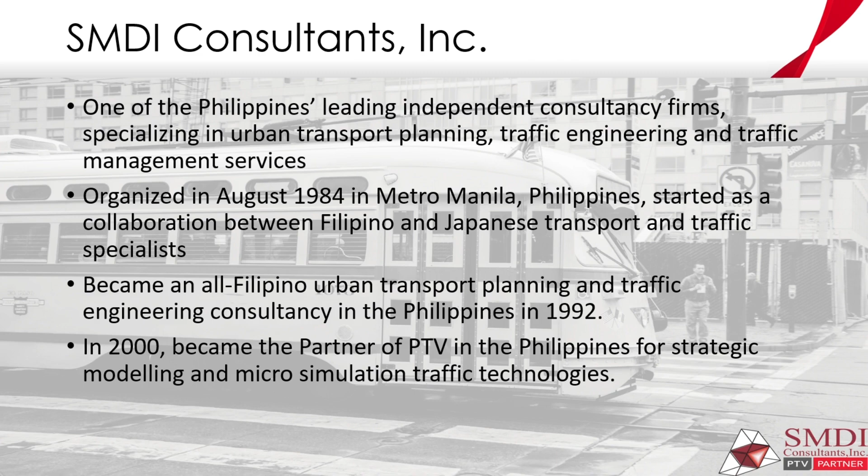SMDI Consultants is one of the Philippines' leading independent consultancy firms. Established in 1984, we specialize in urban transport planning, traffic engineering, and traffic management services. In 2000, we became the partner of PTV in the Philippines. Our main objective in today's webinar is to understand how PTV Vistro is used in traffic impact assessment.

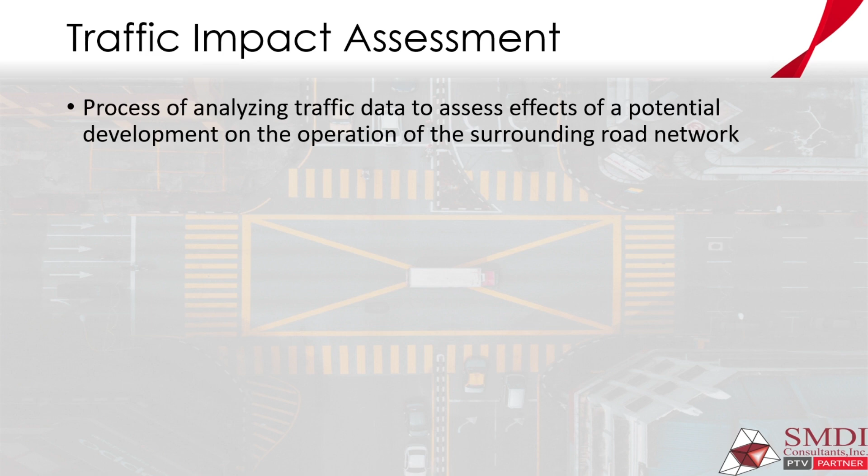Just to refresh our memory, traffic impact assessment is defined as the process of analyzing traffic data to assess effects of a potential development on the operation of the surrounding road network, as a new development is expected to generate additional traffic. Basically, the main objective of a traffic impact assessment is to compare the existing traffic condition on the surrounding road network right before the development becomes operational to the forecasted traffic condition once the development is operational. To arrive at that comparison, we use PTV Vistro to model the following scenarios.

First, we establish our base scenario from existing traffic volumes and composition and existing road network conditions. And then, we forecast future traffic conditions prior to the operation of the proposed development to establish the future without scenario by applying traffic growth rate, which accounts for projected increase in traffic due to regional growth and development. In this scenario, we usually assume that road network geometry and intersection controls will remain the same as base scenario. However, if there are known projects or plans that will be implemented before the operation of the proposed development, those

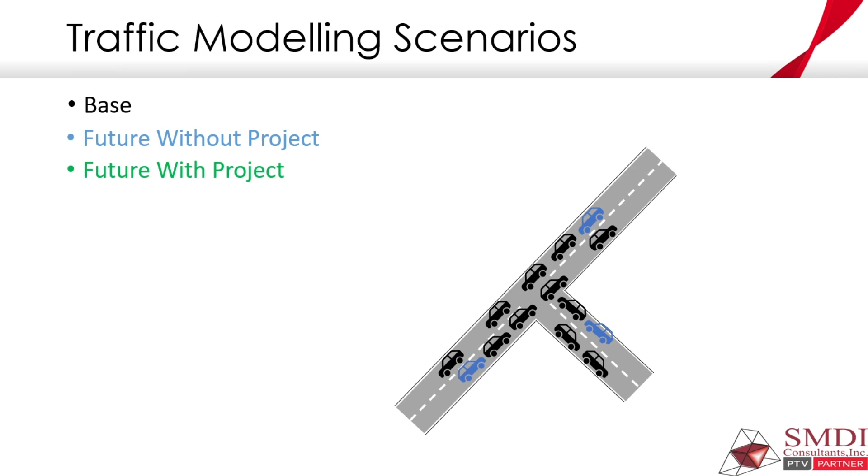changes must be incorporated. And then, we establish the future with project scenario by determining the number of trips expected to be generated by the proposed development and adding that to the future without scenario. In this scenario, we will be able to determine the effects of the proposed development on the road network through different criteria such as volume capacity ratio, average delay, and level of service.

Depending on the location, local government units or the planning department that has jurisdiction in the area may have different tolerance or acceptance criteria on the worsening of traffic conditions. Usually, LGUs do not grant consent to proposed developments which will worsen traffic conditions. In those cases, we can recommend traffic management measures such as change in priority in intersections, additional lanes, change in lane assignments, or even traffic signalization to bring the traffic conditions to the same level as the without project scenario.

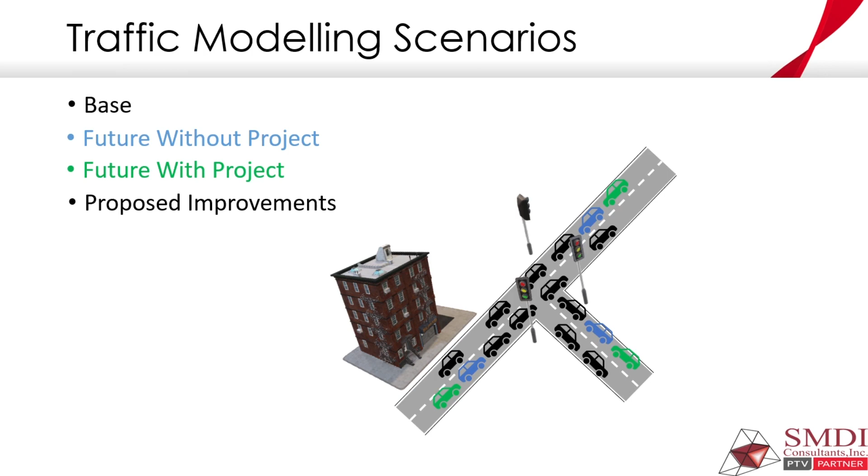Now, here's our TIA checklist of the necessary data and information to perform traffic impact assessment. First, the development profile containing the size of development per land use, for example, the number of residential units, commercial area, office area, or retail area, to estimate the number of trips that may be generated by the proposed development.

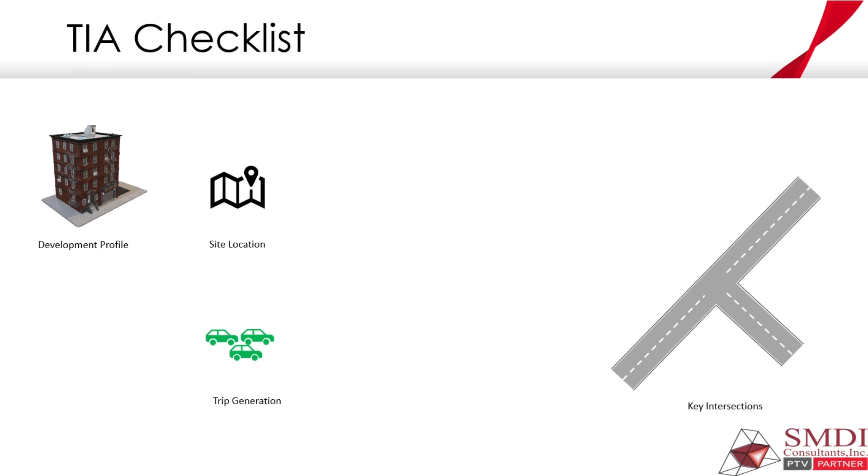Next, site location, which will bring us the study area and key intersections. Local TIA guidelines usually set the extent of the study area containing the intersections needed to be analyzed depending on the size of the proposed development and its proximity to major roads. And once we determine the intersections, we determine intersection properties such as lane width, lane assignment, presence of pocket lanes, and traffic signal phasing and timing if applicable.

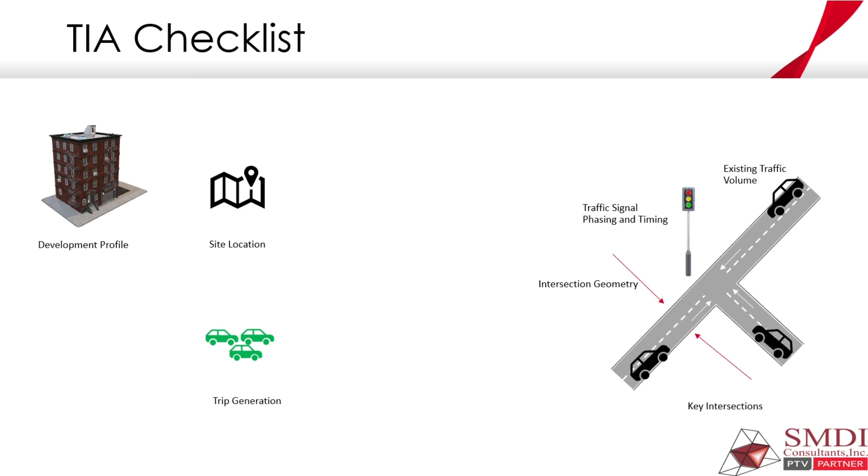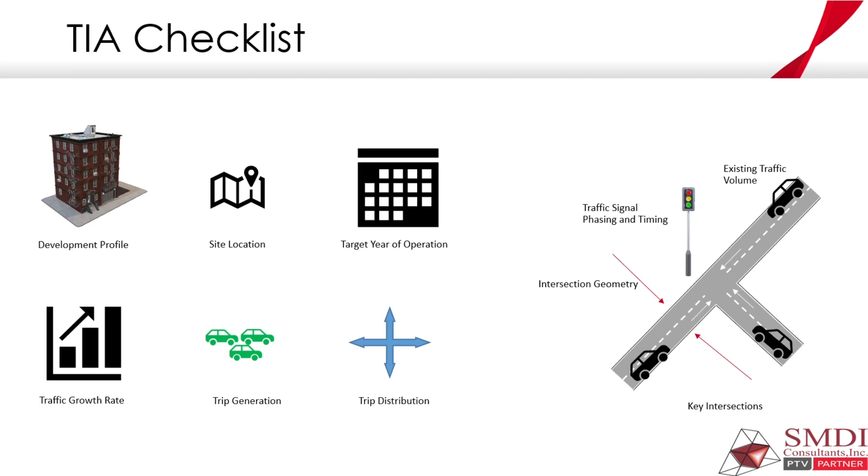Furthermore, we need to obtain the existing traffic traversing the road network in our study area. And then, in establishing the future without condition, we need to know the target year of operation and the traffic growth rate that we will apply on the background traffic. And finally, we need to obtain available data on how we will distribute the projected trip generation to different directions in the surrounding area.

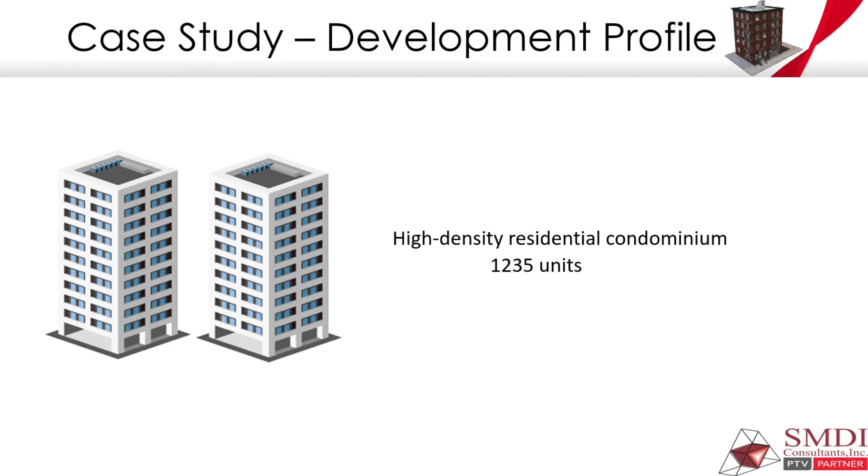Our case study is a high-density residential condominium with 2 towers of 20 floors each containing a total of 1,235 residential units. The site is in the National Capital Region of the Philippines, specifically in the city of Las Piñas, at the northwest corner of what we will call SMDI Road and PTV Road.

For now, we can already proceed with how PTV Vistro is used in the preparation of traffic impact assessment. All other information from the TIA checklist will be discussed along the way. So, let's start with the base scenario. As you can see on your screens, for the purpose of this webinar, the base scenario has already been set up. The study area has been determined based from local TIA guidelines, which includes only one intersection, SMDI Road and PTV Road.

The other two are not intersections. They represent the proposed entry and exit driveways of the proposed development. The proposed development will be located in this corner. The intersection currently has a two-way stop control wherein movements from SMDI Road have priority over those coming from PTV Road. That is why if you look at the traffic control tab, which is here, in the priority scheme, PTV Road is set as stop, while SMDI Road is set as free.

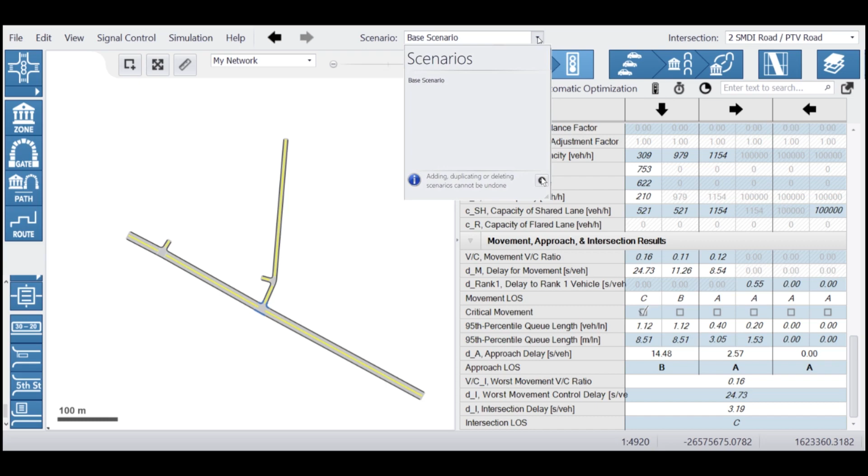In the menu bar, in the upper middle part of our screens, we can see an entry field for scenario. And right now it says base scenario, which is the default scenario when using PTV Vistro. If we click this drop-down arrow here, it will show us the list of created scenarios. Right now, we only have one, which is the base scenario. As you can see, there is a plus sign button here. If we click this button, a new scenario is added. And this is where we are going to model our future without project scenario.

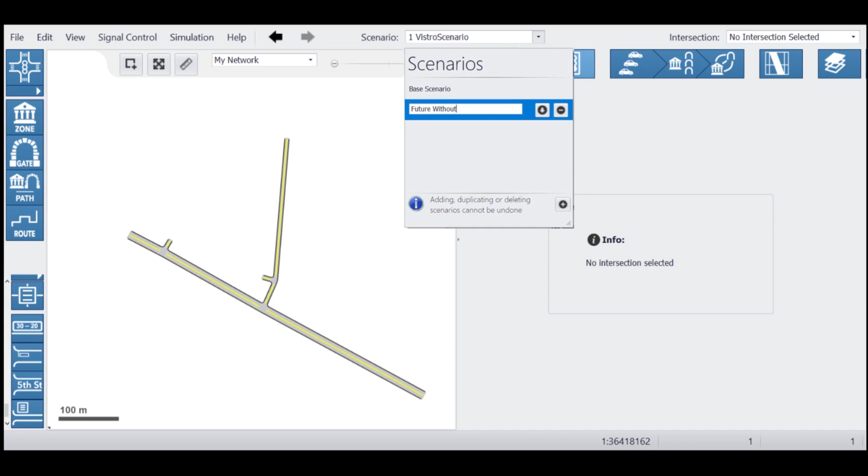We can rename the scenario by clicking this drop-down arrow here, right-clicking on the scenario which we want to rename, and choosing rename. Type in future without, short for future without project, and press enter. To navigate to a different scenario, just click on its name in the scenario list. Now we have created a new scenario for future without project. The only step we need to do in this scenario is to apply the traffic growth factor of 1.1130.

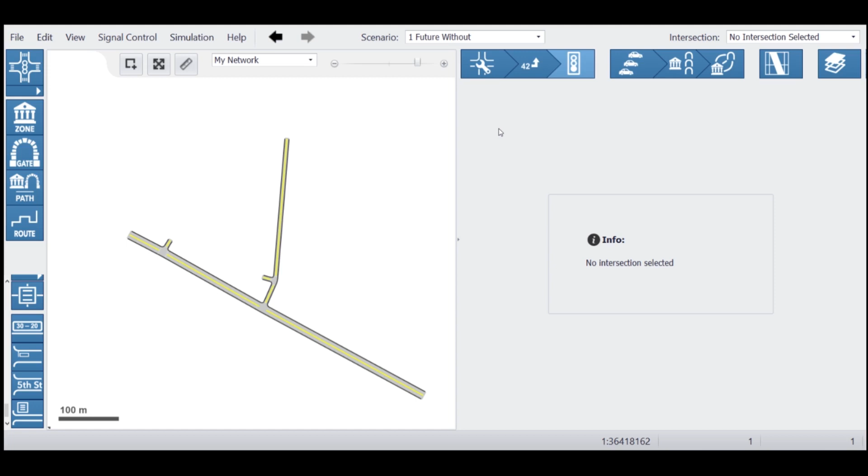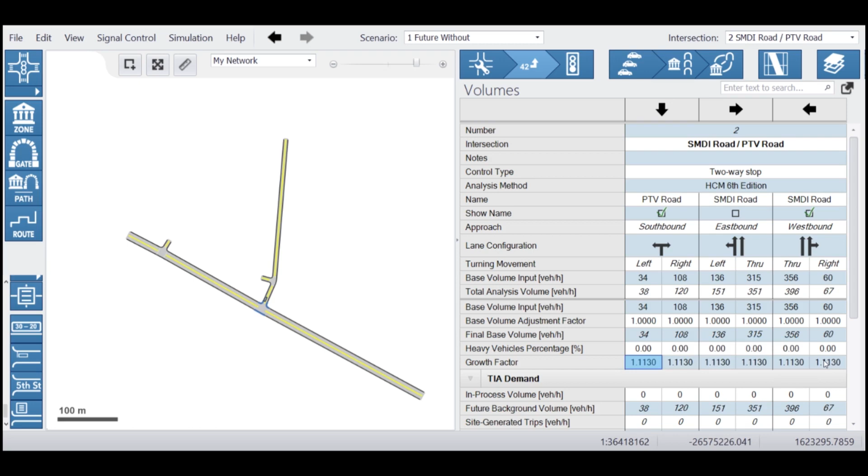To do that, just select one intersection at a time. In this example, we only have one. And then in the volumes tab, which is right here, enter 1.1130 in the row for growth factor. We can edit this at the same time by selecting all entry fields at once and typing in 1.1130. And that's it. If we look in the traffic control tab, in the total analysis volume row, we can see that the volumes increased from the base volume input. The differences in the volumes account for the traffic growth in the area.

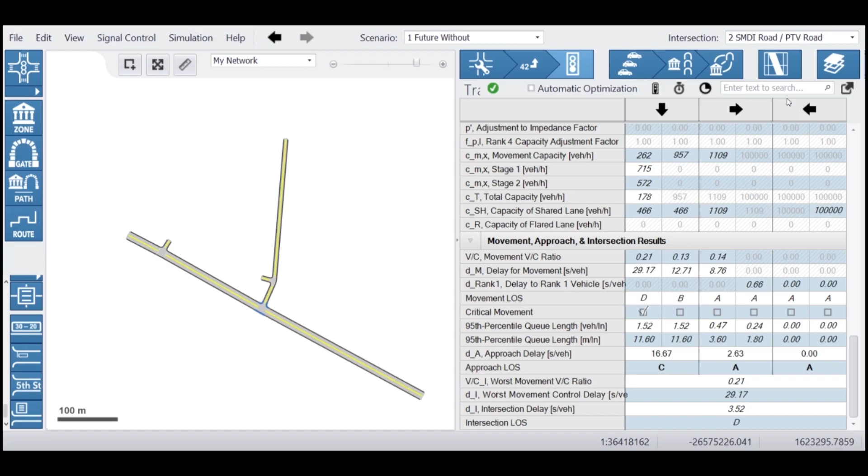Now at the bottom, we can see that the intersection level of service dropped to LOS D with worst movement delay of 29.17 seconds. After creating the future without project scenario, we are now ready for the future with project scenario. In modeling the future with project scenario, we need the following information. First is the estimated number of trips that will be generated by the proposed development at peak hours. In this case, the number of vehicles projected to enter the development is 103, while the number of vehicles projected to exit the development is 165, for a total of 268 trips in the morning peak period.

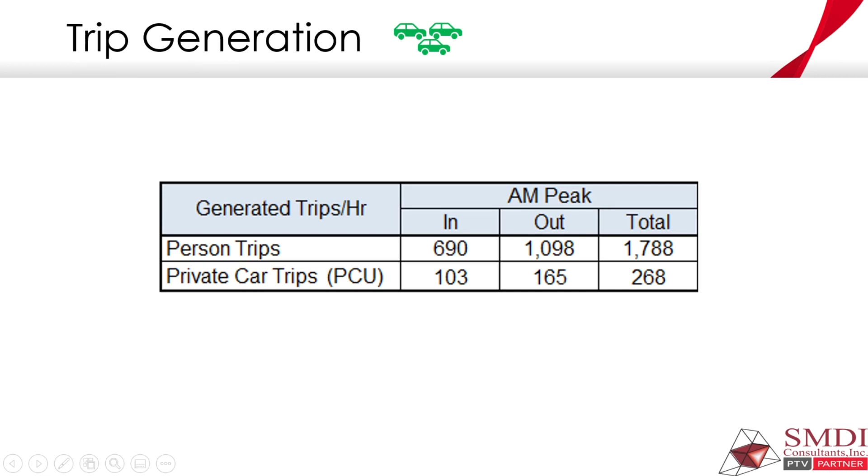Next is how these trips will be distributed in the surrounding areas. In this example, our data show that 17% will go north, 40% will go east, 19% will go south, and 24% will go west, and vice versa.

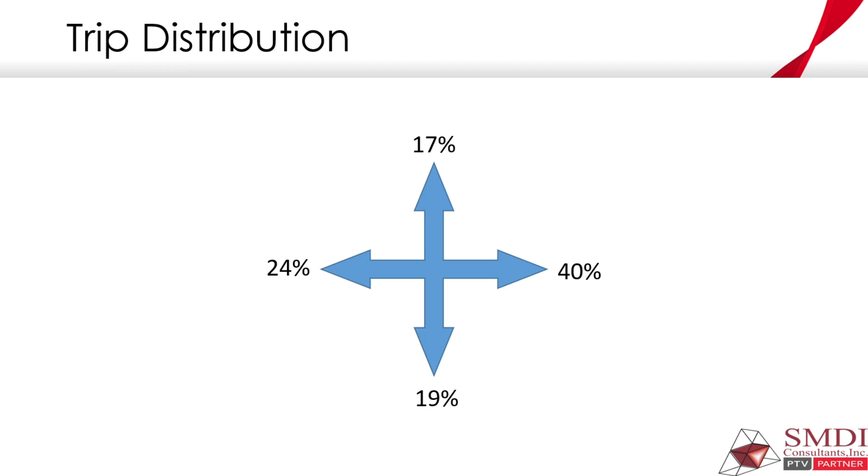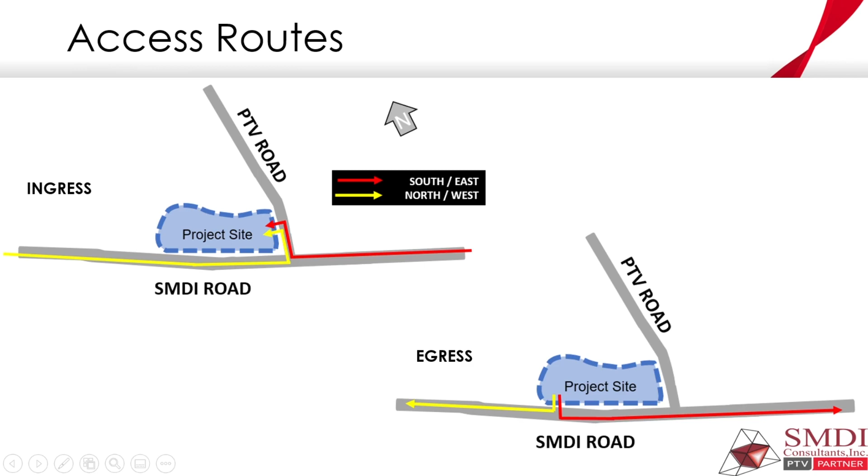Now we can already proceed with modeling the future with project scenario in PTV Vistro. Similar to the previous scenario, the first step is to create a new scenario. However, instead of clicking this plus sign button here, we have to right-click in the future without project scenario and click duplicate to create a new scenario that incorporates the changes we made in the future without scenario, particularly the traffic growth factor.

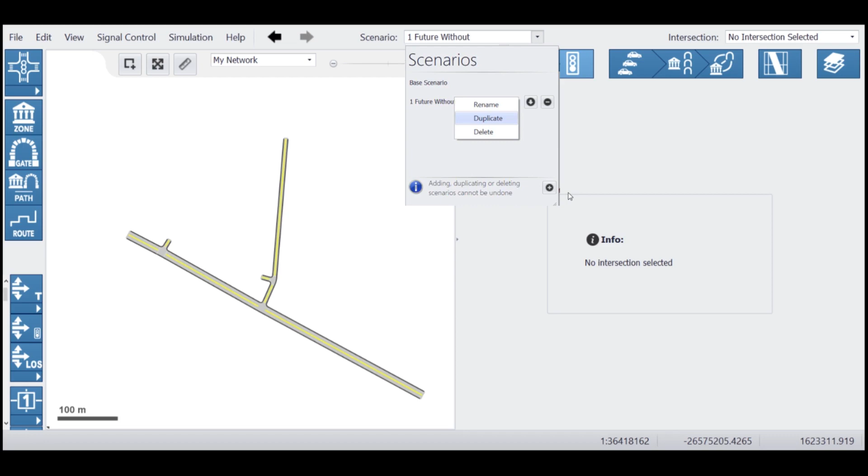If we click this plus sign button here instead, we will be able to create a new scenario which will start with what we have in the base scenario, so we will have to enter the traffic growth again. So let's select duplicate, and again we can rename this scenario by right-clicking and selecting Rename. Type in future with and press Enter.

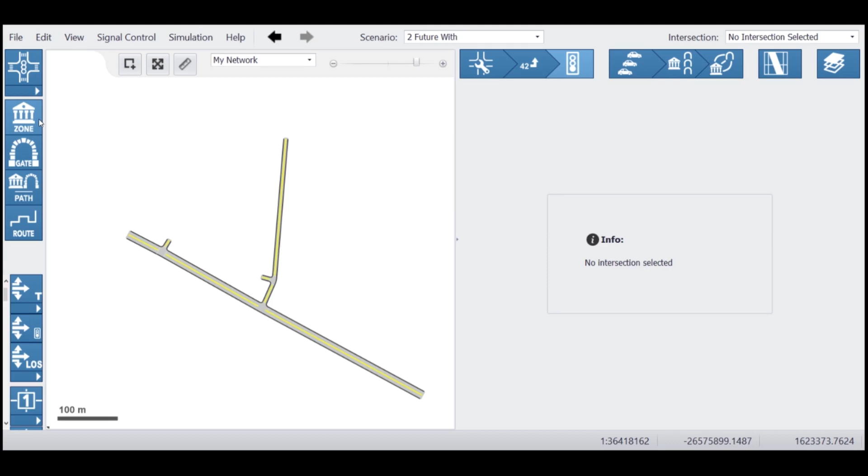The next step is to enter the expected traffic to be generated by the proposed development. In the toolbar on the left-hand side of the screen, click the Zone button to produce traffic. As you can see, the cursor has turned into a zone icon. Click at the location of the proposed development, somewhere here. Now we already have a zone numbered as 18. The number is arbitrary. That represents the proposed development that will generate traffic.

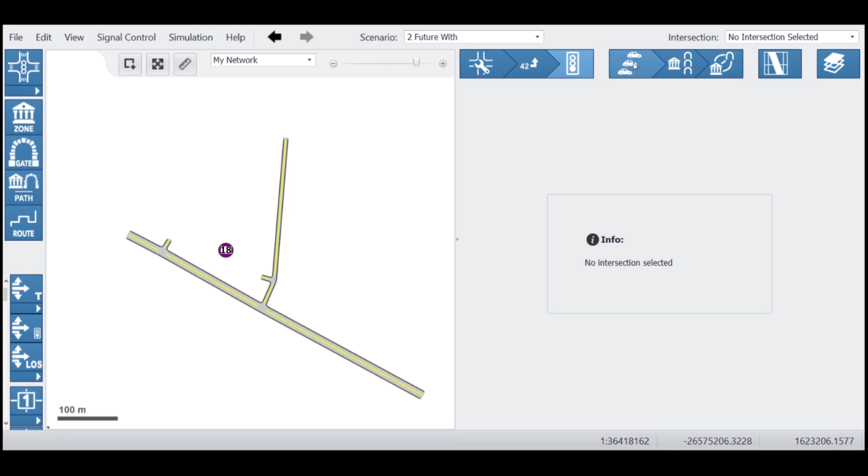However, we still need to enter how much traffic this zone is expected to produce. To do that, click on the Trip Generation tab. As you can see, there is a row numbered as 18. In the data entry column, there is a drop-down arrow. If we click that, we can see that there are two options. The first one is rate, while the second one is trips.

We have to choose trips because our data on trip generation for incoming and outgoing trips are both expressed in number of vehicle trips. If we are given the total number of trips with percentage shares of the incoming and outgoing trips, we have to choose rate. We can now enter the number of trips in and trips out in the morning peak period, which are 103 and 165 respectively.

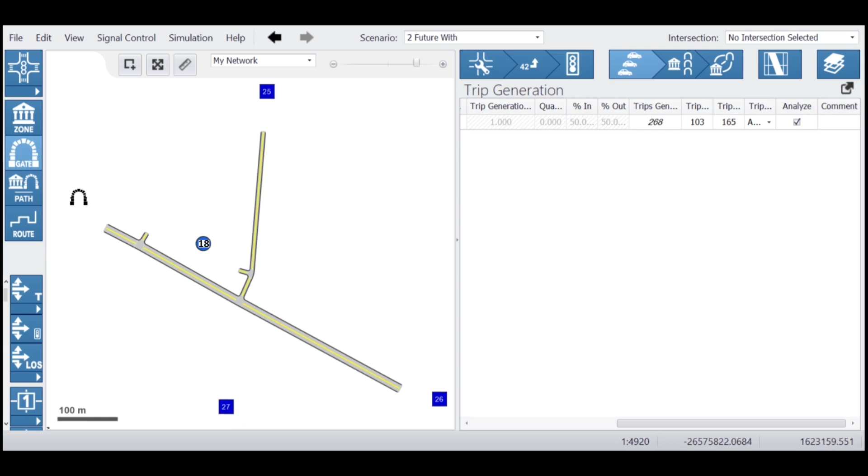Now we have to distribute the generated trips to the north, east, west, and south directions. First thing we do is to insert gates that will represent those directions. In the toolbar, click Gate. Observe that the cursor has turned into a gate icon, and then click somewhere in the north. Then repeat this step for the east, south, and west directions.

In the Trip Distribution tab right here, observe that there are entry fields for trip shares from each gate to Zone 18 and from Zone 18 to each gate. This is where we have to enter our data for trip distribution. From what I have shown earlier, 17% of the trips will come from north, 40% from east, 24% from west, and 19% from south, and vice versa. So we just have to enter the same values in the next column: 17, 40, 19, and 24.

After distributing the trips, we have to reflect the expected paths that site-generated vehicles will most likely take going to the north, east, west, and south directions that were shown in our screens earlier. In the toolbar, click Path to create paths connecting the zone to the gates and vice versa.

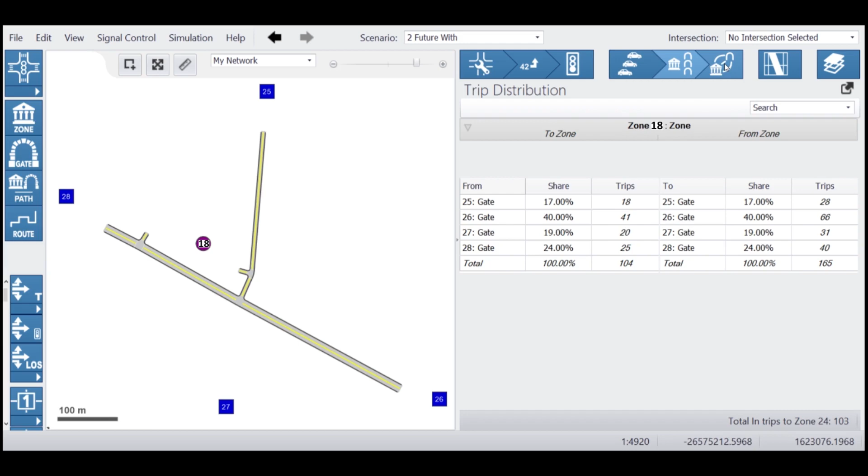First, click on Zone 18, connect it to the egress driveway, trace the path going to the north by clicking at the right directions in the road network, and finally, click on the gate representing north. Repeat this step to create paths going to other directions. Now that I have created paths going to and coming from the other directions, in the Trip Assignment tab, observe that there are 8 rows for the paths that I have created.

In the Volume Share column, let's enter 100%. Drag all rows, type in 100, and press Enter. If there are 2 or more possible paths coming from the proposed development to a certain direction, the volume share of 100% must be distributed to those paths based from your available data. But in this case, there is only one likely path for each zone gate pair. That's why we entered 100% for all.

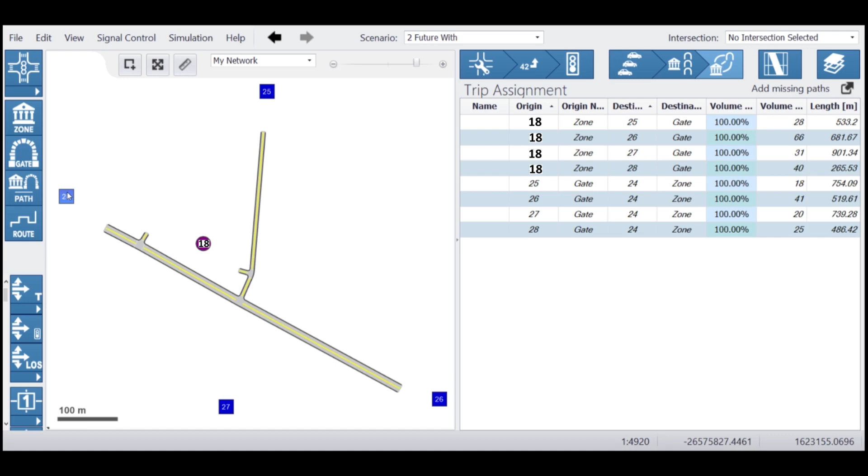That's all for a future with project scenario. If we look into the traffic control tab, we can see that the intersection level of service dropped to E with worst movement delay of 40.08 seconds. Comparing all scenarios, we can observe that the intersection level of service dropped from C to D in the future without project scenario and to E in the future with project scenario.

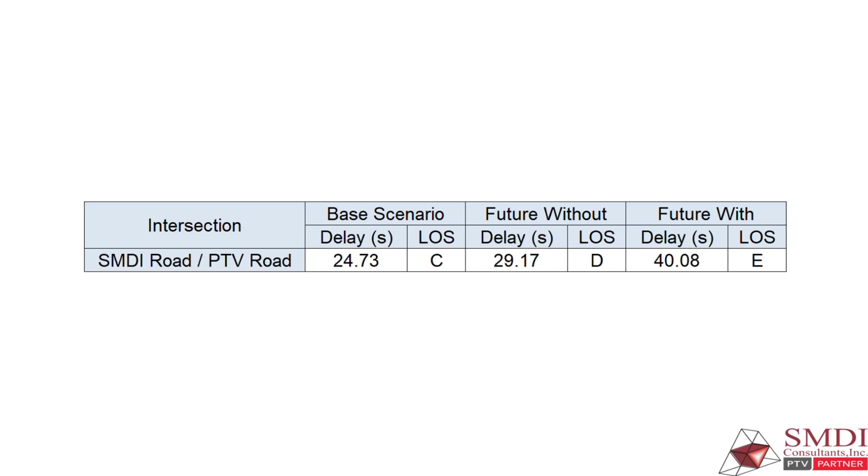As mentioned earlier, the local government unit or the planning department that has jurisdiction in the area may require physical improvements in the intersection to bring the level of service closer to or better than the future without project condition. To create a future with project scenario with proposed improvements, just duplicate future with project scenario, then rename the new scenario to proposed improvements. Here we can propose any improvement that is feasible subject to approval of local authorities.

Improvements may include addition of pocket lanes, widening of the road, traffic signalization, change of intersection control, change of lane assignments, and so on. In this example, I propose traffic signalization which improved the level of service of the intersection from E in the future with project scenario to level of service C with average delay of 23.94 seconds.

And that's it. This table may be inserted and discussed in your traffic impact assessment report, or you may generate reports from PTV Vistro and attach them in your traffic impact assessment report, or you may also submit a copy of the Vistro file to the local government unit depending on their requirements.

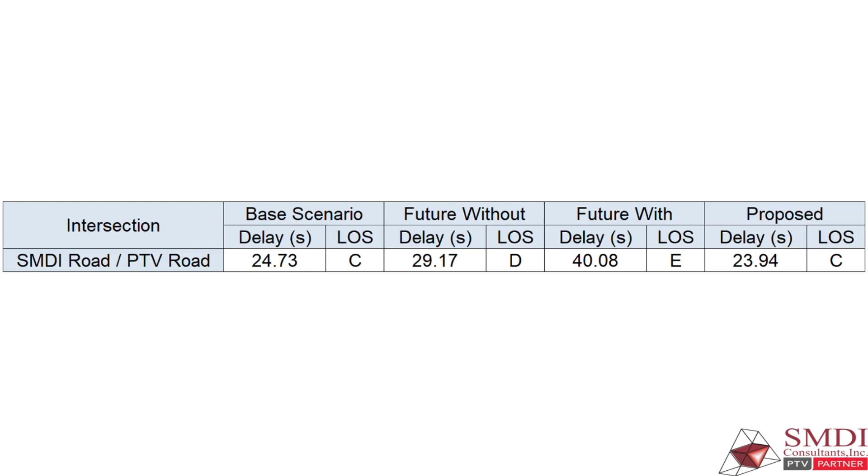In this webinar, I hope you were able to appreciate how efficient modeling multiple scenarios can be using PTV Vistro, from creating and duplicating multiple scenarios in one file, applying traffic growth factor in one click, inserting zones and gates that generate and consume traffic, up to assigning paths with the aid of visual representation of the road network. Everything is easier, more efficient, and less prone to human error as compared to manual calculation or use of spreadsheets.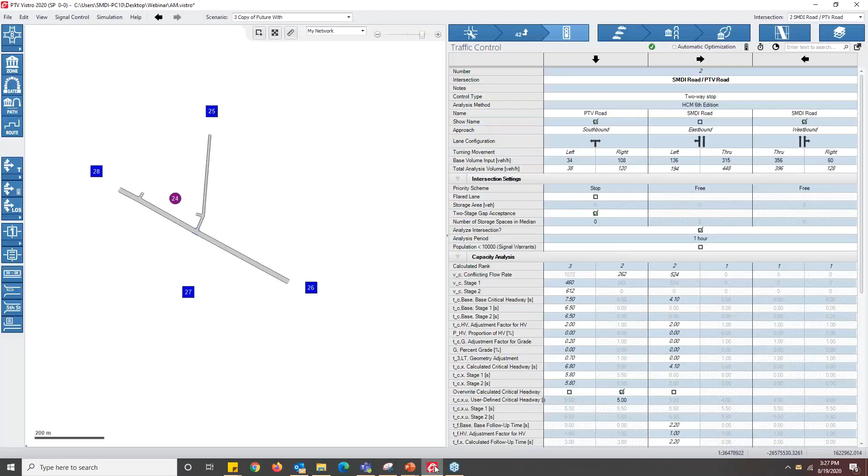Then, how does it calculate gap acceptance across single lane and multiple lanes? For this question, I believe PTV Group would be the best ones to answer it. Like I said earlier, you can visit ptvgroup.com for previous webinars, or PTV Group will email you about this question, and they will answer it.

So, can Vistro handle analysis of multiple intersections which are close to each other? Vistro can analyze multiple intersections in one network, but the analysis is independent. So it analyzes each intersection independently. So I hope I was able to answer your question. So if you want to determine the effects of multiple intersections, it is better if you use VISSIM.

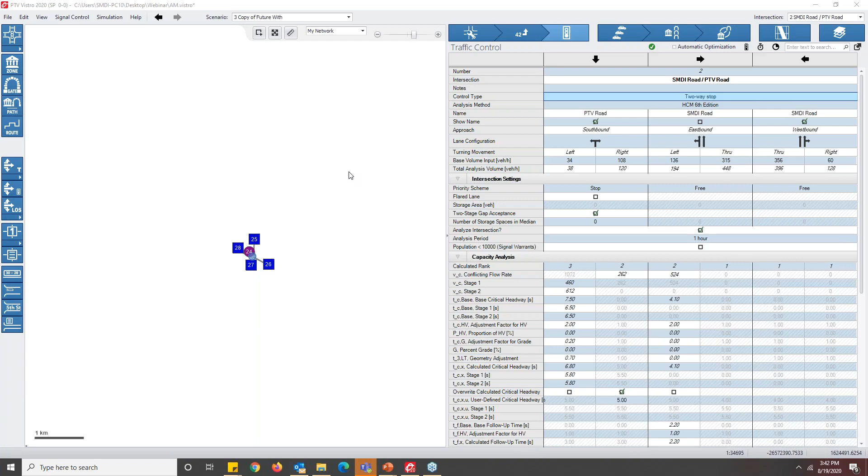Next question: what are the common errors in creating a Vistro model? Oh, this is a tricky question. I'm not sure. Maybe it depends on the user. I've used Vistro for quite a while now, that's why I cannot think of possible errors.

Maybe, oh, a colleague of mine suggested that sometimes people forget to change the global settings. So if you click the edit menu, there's global settings. Every time you do a Vistro model, make sure that the global settings are set to your local standards.

So for example, the direction of traffic in the Philippines is right-hand traffic. So if you're living in a country with left-hand traffic, you may want to change this part. And then the units.

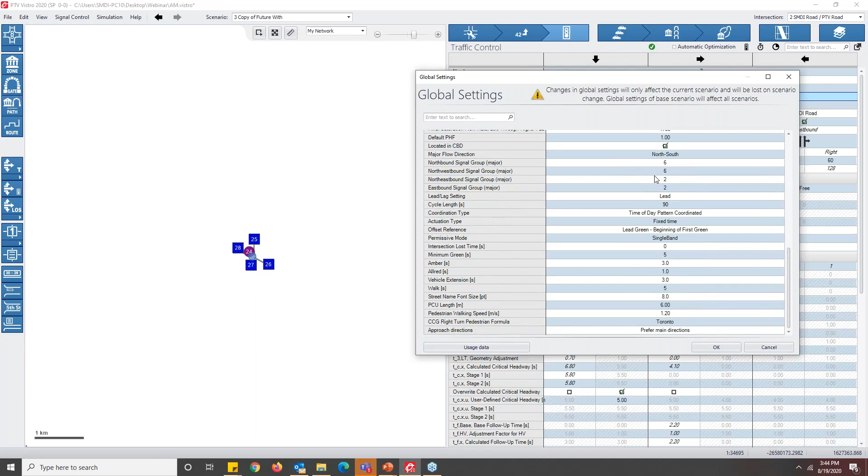And other common errors: maybe when entering the data, you might want to double check every time if the numbers you've entered are correct. And the lane assignments, no, maybe not lane assignments. I think you just have to make sure every data that you input is correct. So you might want to double check every time.

Because most especially with your base scenario, when you move from one scenario to another, there's quite a lot of things going on. So it's better if you double check every data from every step that you do. So I hope that answers your question.